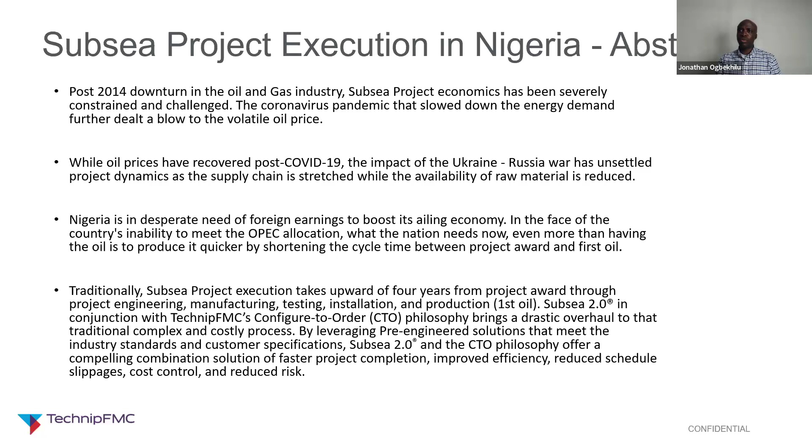So we look at the challenges in the industry. I like to look at it from two lenses: one is the geopolitical lens, the issues that are very bespoke to us as a nation, and then of course the industry issues. So I look at the national challenges first of all. In the last 10 years, there has been no investment in the subsea sector. You will all bear witness to that. The last major investment we had in the country was 2012, 2013. And since then, it's just been scraping the bottom, trying to clean up and intervene and stimulate the old wells that we have.

In addition to that, there has been oil theft and pipeline vandalism. And you know very well that sometime 2 or 3 years ago, there was an analysis that came out that we were losing upward of 80% of our production to pipeline vandalism and oil theft. And this has led us to a point where we are unable to meet our OPEC allocation. And this has also driven us to a very high inflation with the devaluation of our Naira.

So these are bespoke issues that are bespoke to us as a country, Nigeria. Now, on the industry side, we also have the exploration risk. And we also know that subsea is very expensive and has a long cycle time. It will take about 10x time, cost and risk to marinize the technology you have on the surface to be applicable in the subsea. And so that can be very significant.

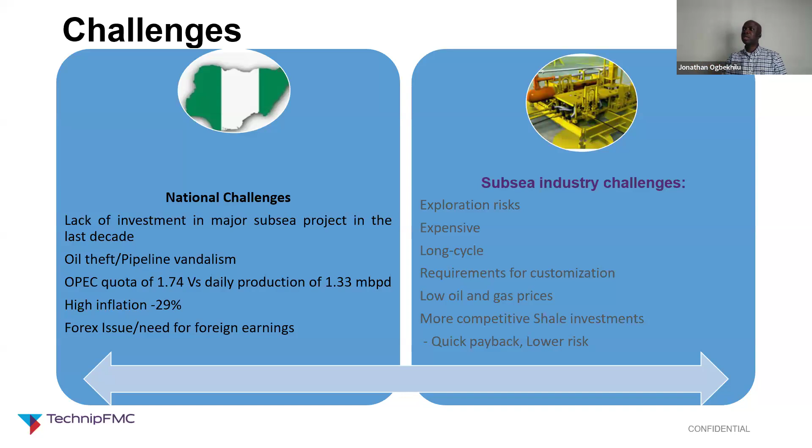And so looking at these two challenges, we begin to see also a solution that is two-pronged. And so we look at a solution that addresses the national issues. Justin Trudeau, the PM of Canada, once said, no country would find 173 billion barrels of oil in the ground and just leave them. And that is absolutely true. Even though as a nation we do not have half as near this amount of oil in the ground, we have a significant lot. And our growth as a nation, our development, is hinged upon our oil, God-given blessing.

And so as a nation, we have started to see just recently some wheel cranking activities to begin to move the oil industry from what it has been in the last 10 years to where we need it to be, so that you and I, who are the professionals in the industry, can be much more active, and the nation as a whole can begin to profit from what we have as a blessing deposited on our soil.

And so we begin to see the government moving in the direction of waiving some fees, such as signature bonuses, fiscal incentives such as tax incentives, tax exemptions, and remissions. And this is contained in Order 40 of 2024. We also see the government issuing presidential directives on reduction of petroleum sector contracting costs and timeline. All of these are happening in a row this year, in the first quarter of this year. And so we begin to see some level of attention given to the industry and to the problem, and these are going to unbundle and debottleneck the problems we have that are specific to us as a country.

So first of all, we have that it's a pre-engineered product. And being pre-engineered means that at project award, there is no need for engineering. And if you are familiar with project execution, it takes a lot of effort to do project engineering. There's a lot of cycle time between incorporating the customer-specific designs and all

of those specifications. We also have for Subsea 2.0 predefined quality and surveillance requirements. We have pre-approved and qualified supply chain. These are the key attributes coming out from Subsea 2.0. And then we have optimized manufacturing with dedicated capacity, predefined and developed services. This concerns us very well. And then, of course, leading to a commercialized platform.

These key attributes have given us the benefit we have on the right-hand side, which is delivering for us a consistent and shorter delivery schedule. And I know for an operator, that is significant; the delivery time can be a game changer for whether a project goes ahead or not. And so the other key benefit we have there is guaranteed cost control.

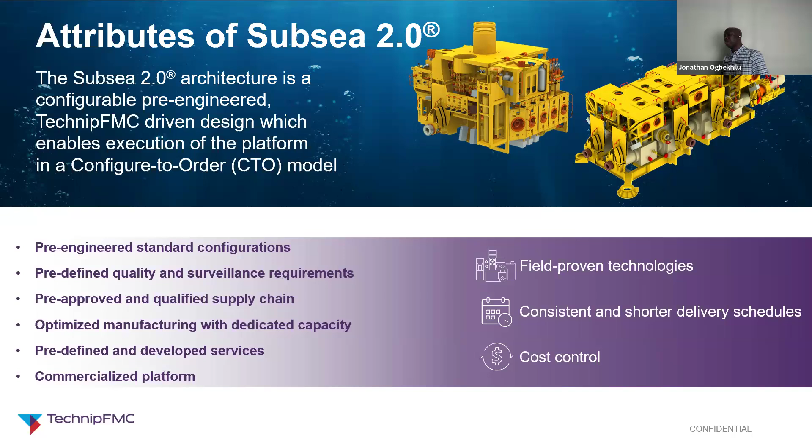So let's take a quick look at the execution model between the 1.0 and the 2.0, looking at the schedule. For the 1.0 schedule, we have a very long break-even period, which is the time it takes for the operator to begin to reap the benefit of his investment or high investment. And of course, we have a very deep CapEx, which also represents a lot of effort on the operator before he starts to recoup.

Now, in comparison with what we have on the right-hand side, with the green line representing Subsea 2.0, we begin to see a shorter break-even time, a shallower CapEx, and the difference, which is the delta T there, like I said earlier, is a significant determinant, and that can be a go or no-go decision for whether to invest or not to invest. And that can also bring about a sustainable improvement in cash flow, which is essential to make subsea attractive, and in turn risk reduction for us as a nation, and begin to change the narrative that we currently have.

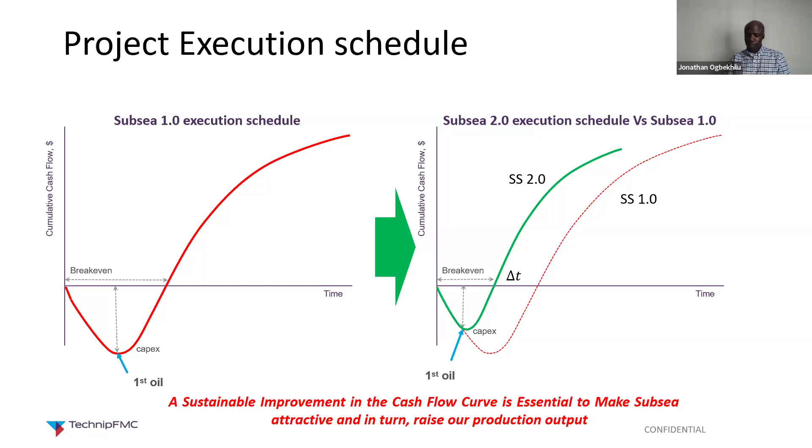The fact that this is a contractor-led initiative doesn't mean that we have thrown away operators' requirements or industry standards. No, our tree components are compliant with the regulatory API 6A and 17D requirements, and our manifold products are also compliant with the API 17P, whereas our control system and metering products are compliant with the API 17F, and also the qualification plan is compliant with the DNV recommended practice A203.

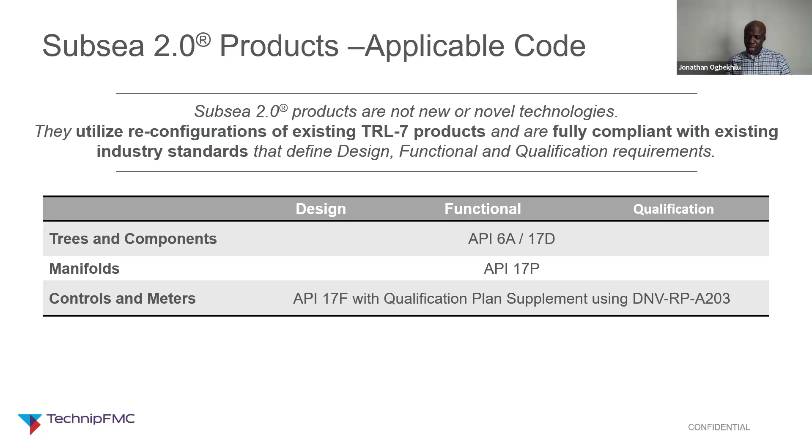So let's take a quick overview look at the key products that have been impacted by this shift. Here we will be looking at the tree products, the subsea tree mounted controls, and the manifold mounted control systems as well. And then we'll look at the manifold products as well.

Again, just before we move into that, I'd like to also show here what has made Subsea 2.0 a differentiated proposition. We have applied lean thinking to redesign our product to be smaller, lighter, and simpler, thereby making it easier and faster to install and configure, to manufacture, to assemble, and to test quicker. And we have also focused on functional requirements instead of prescriptive client specification.

We have incorporated very limited new technologies, thereby removing the need to requalify these products. So these are basically existing qualified products from the industry. And we know that the industry is not such that jumps at very new products or new technology. It's a very modest industry. And so we have incorporated only very limited new technologies. Rather, we have reconfigured field-proven and existing technologies.

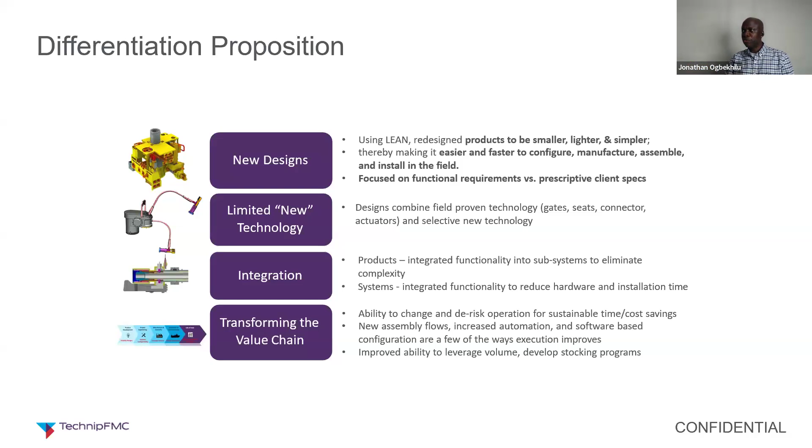So we'll move straight into looking at the key products. This will be a top-level overview, not deep. We're not going to be able to be subsea engineers in today's session. However, we'll look at how we have repurposed our tree system with the applicable Subsea 2.0 attributes. So for pressure rating of our tree system, we have two broad categories.

We have the 10K PSI and the 15K PSI, and we have the 5-inch bore for both the 10K and the 15K PSI, and then the 7-inch bore for the 10K PSI.

Now for the tree types, we have the horizontal and the vertical in the wellhead, and lastly the vertical with the tubing head. So these are the two variants of the vertical tree types: the wellhead completion type, and the one with the tubing head.

For the operating mode, we have production, water injection, and gas injection. And for temperature, we have both the 300 degrees Fahrenheit and the 350 degrees Fahrenheit compatible Christmas tree, able to withstand pressure up to 3,000 meters and designed for 25 years.

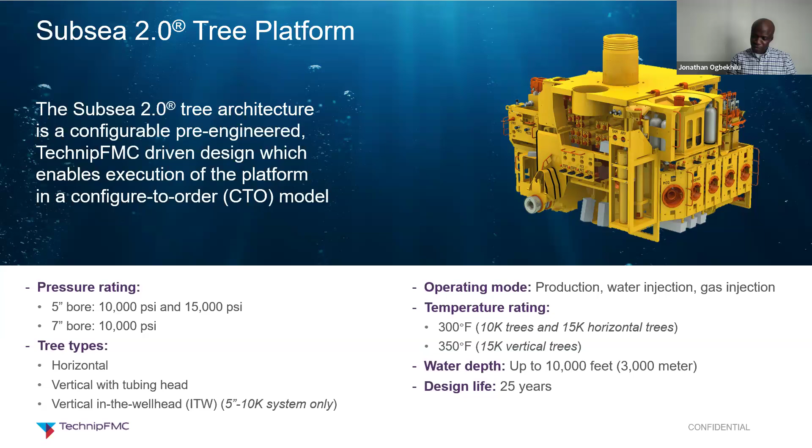Let me laser point my pointer.

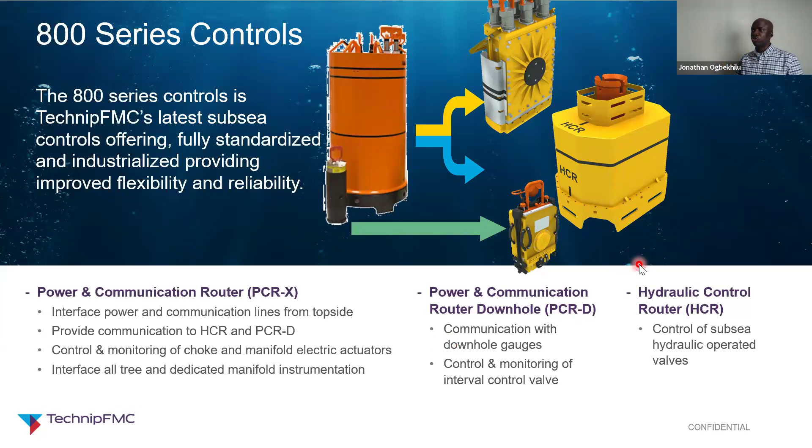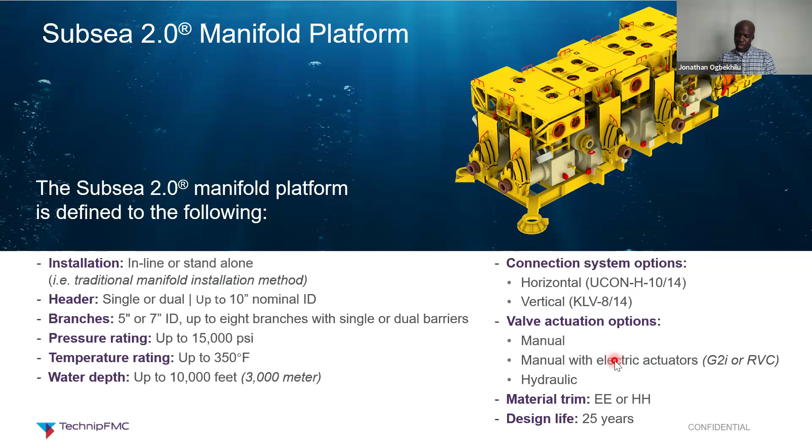In this next slide, I'm just going to cycle through an illustration of how the modular build of Subsea 2.0 products offers us, and offers the operator, lots of benefits in terms of product selection and project execution.

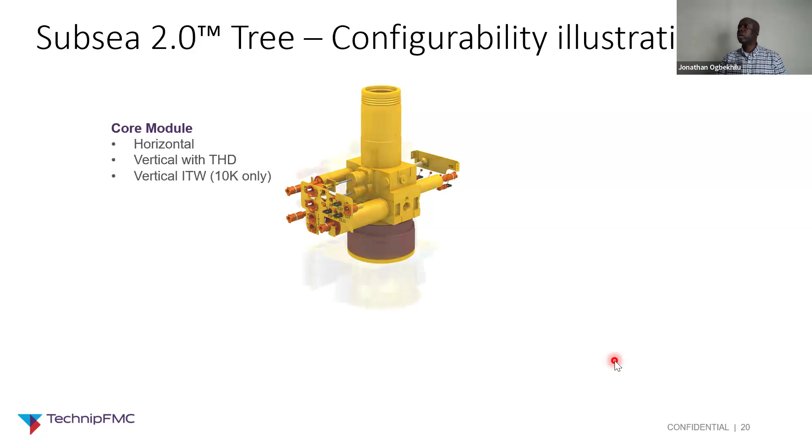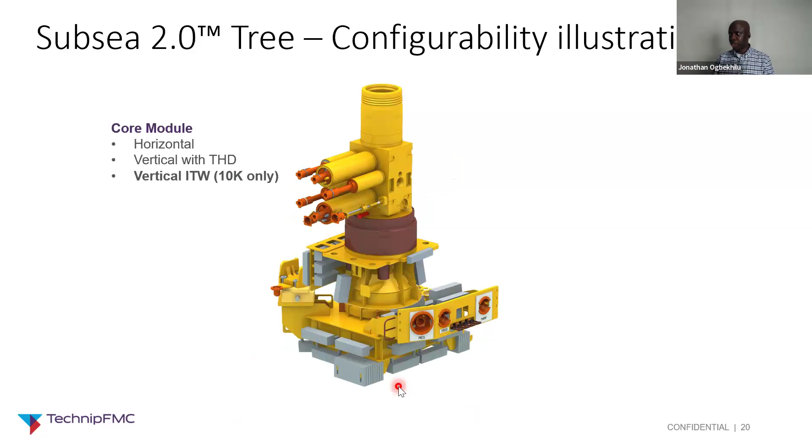So we see here the core module for the subsea Christmas tree. This can be the horizontal Christmas tree, and next we have the vertical with the tubing head, which houses the tubing hanger for this type of completion. And then we have the vertical in-the-wellhead completion. This is for the core module.

And then for the annulus module, we have the minimum function. These are opportunities, or options, for customers to choose from. So the fact that Subsea 2.0 is contractor-led doesn't mean we've gone ahead to take a lead without considering operators' needs. No, we have left a lot of options and bandwidth for operators to make choices. And this comes from over a century of experience in the industry as a company, TechnipFMC.

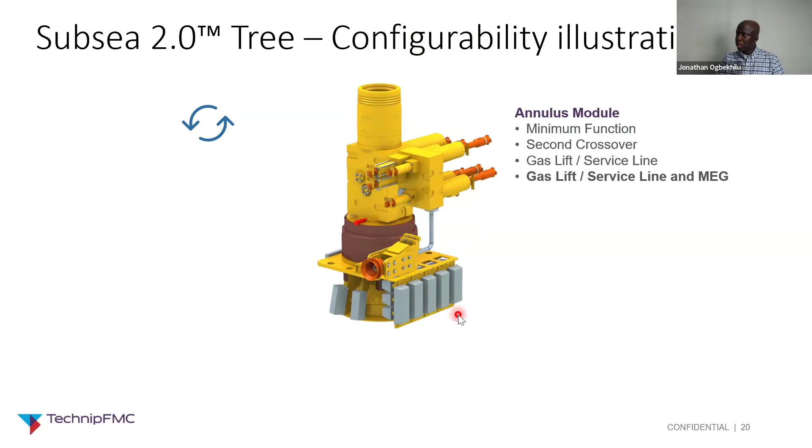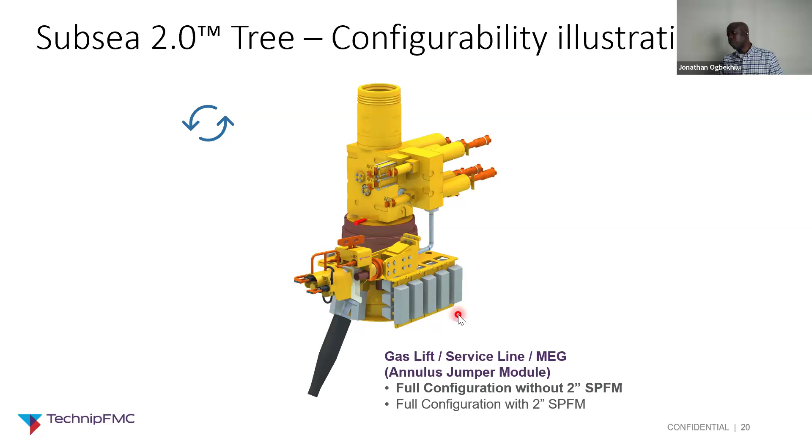So we also have the annulus module with a second crossover. We have the opportunity to offer the annulus module with gas lift and service line, and then the option for gas lift and service line with possibility for MEG injection. Now for the gas lift and service line, we have the full configuration without the 2-inch single phase flow meter, and we also have the offer for full configuration with the 2-inch single phase flow meter.

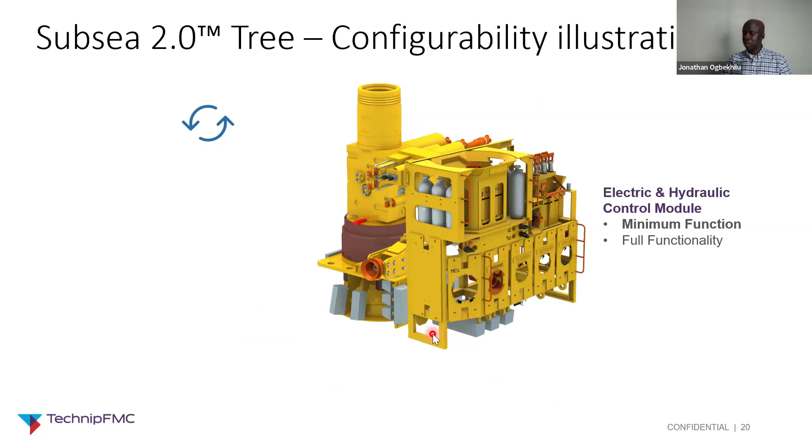Now for the EHM, which is the electro-hydraulic control module, we have the module for minimal functionality, and then the next one is the one with full functionality.

Now for the injection and production module, we have the injection module with or without resident flow meter. We have the opportunity to also offer injection module with flow meter, the production module without flow meter, and lastly, production module with flow meter. So these are opportunities and options for the client to choose from, without tying down valuable time in engineering of customer-specific requirements.

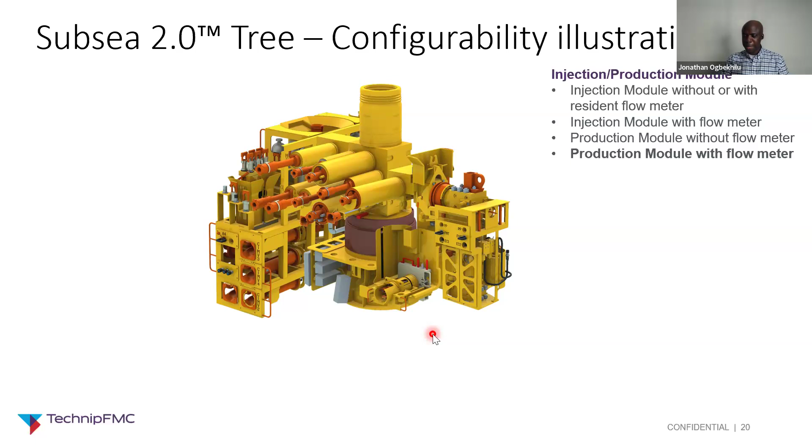Mr. Jonathan, you will have about 10 minutes remaining, so we'll have enough time to discuss during the question and answer period. Think about that as you summarize and continue.

Thank you. That is noted.

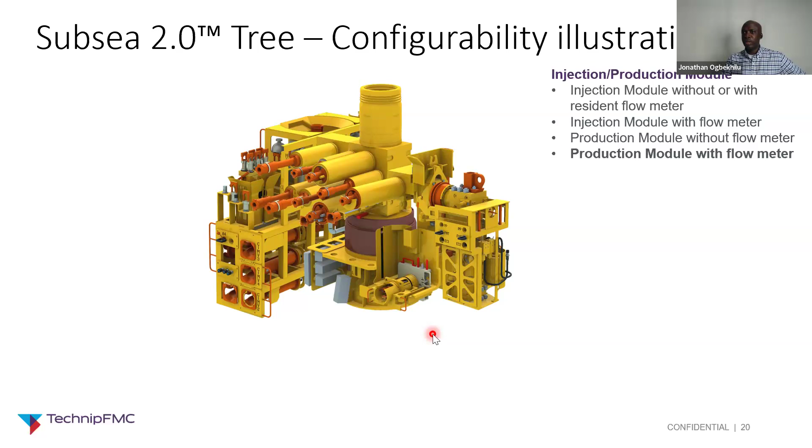Thank you very much. So, taking advantage of the modularity and flexibility built into Subsea 2.0, we have come up with an optimized execution model, which basically looks like this. If you look at the first time scale, which is the legacy execution schedule, having engineering, procurement, manufacturing, assembly, and test.

For Subsea 2.0, leveraging pre-engineered and pre-configured subsea products and systems, we have eliminated the time required for engineering. At project award, we dive straight into procurement, manufacturing, assembly, and test. Again, I'd like to stress that this is a huge advantage for operators. This can be a game changer. This can be a go or no-go decision point for operators.

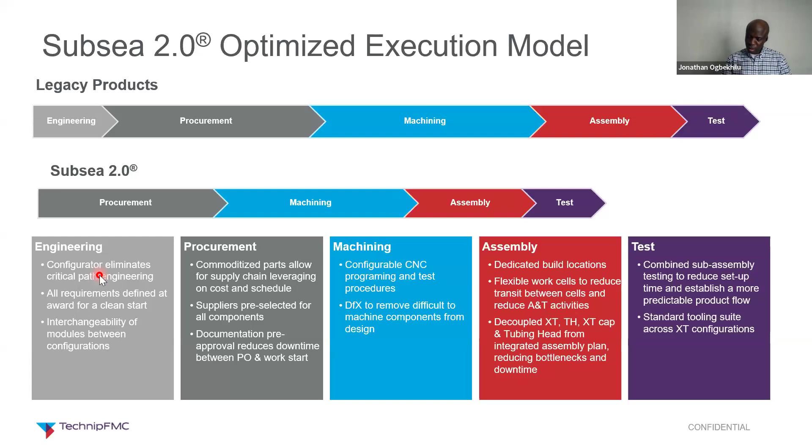Now, moving over to subsea services, I'd like to stress that these benefits and advantages that we see with Subsea 2.0 don't just start and end with project award and up to delivery time. No, it goes ahead. We continue to reap the benefits of Subsea 2.0 products across the value chain through the life of field support.

And so for subsea services, I'd like to mention again that the Nigerian base of TechnipFMC is largely a subsea services hub, customer support, or life of field support hub. So this is basically where we reap the benefits of Subsea 2.0.

After the project is delivered and first oil is achieved, we continue to reap the compounding effect of the modularity and flexibility built into Subsea 2.0. So we look at the global library of documentation, and because Subsea 2.0 is a standardized product, we have a global library of standardized documentation to support onshore and offshore activities. This can be a significant time savings for customers.

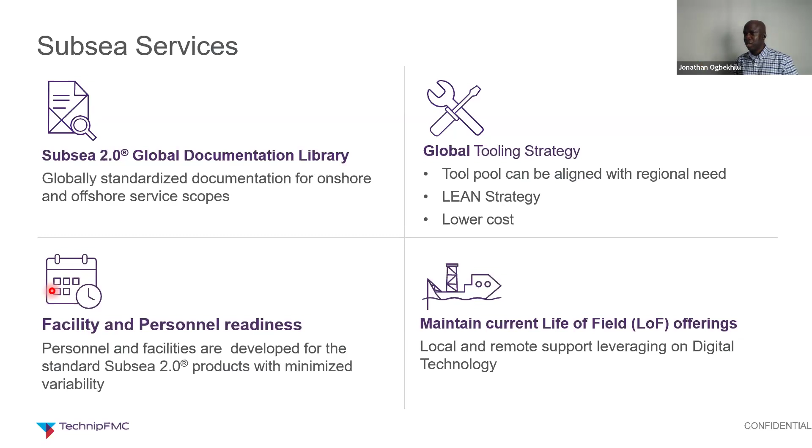This brings us to the end of my presentation, and I'd like to welcome questions and answers. Over to the moderator.